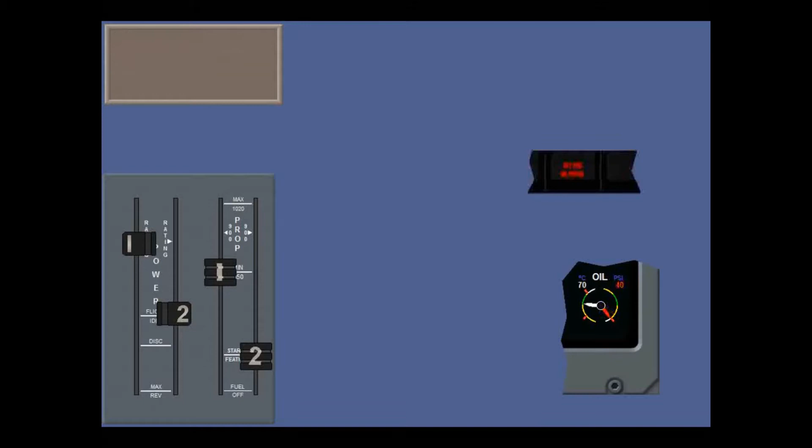Continuing with abnormal power plant conditions, let's start with low engine oil pressure. In flight, if an engine's oil pressure moves out of the normal green arc into the lower yellow band, reduce power by retarding its power lever to flight idle, and move its condition lever to start and feather to reduce drag. But if the pressure drops below 44 psi and the engine oil pressure warning light comes on, shut down the engine according to abnormal and emergency checklists.

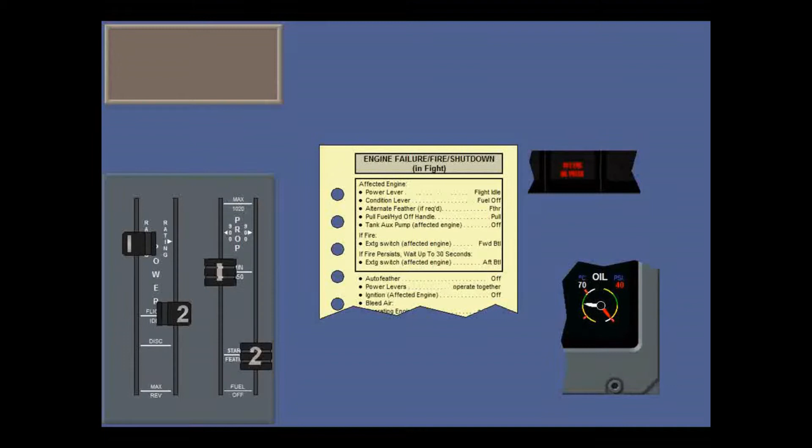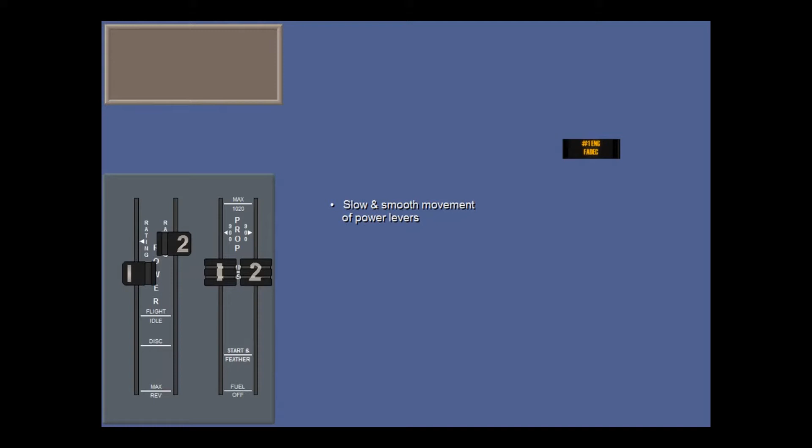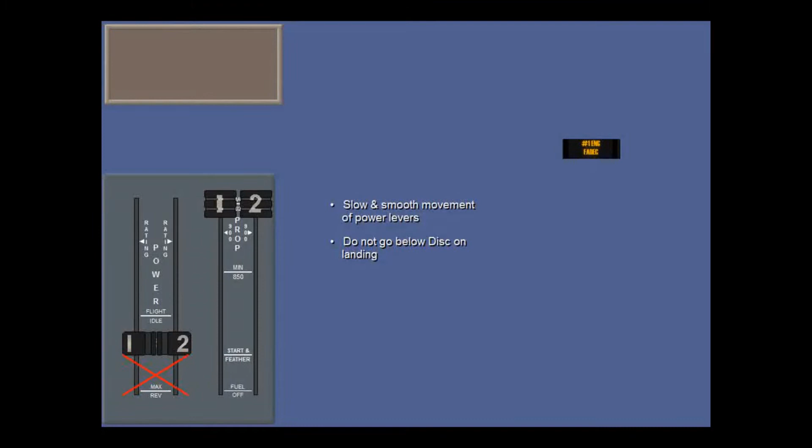If you see a FADEC caution, it could be failure of one channel, or it could be more serious. Use only slow and smooth movement of the power levers. If torque is not even, then you may need to operate the levers asymmetrically. Do not go below Disc on landing. The FADEC could give more problems. For example, overspeed governing in reverse may be inoperative.

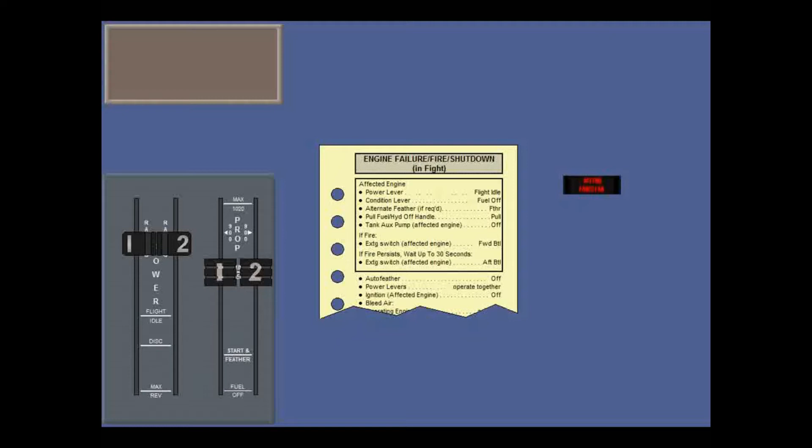However, if you see the more serious FADEC warning, then shut down the affected engine if the FADEC has not already shut it down.

Problems with the propeller electronic control system will trigger a PEC caution light. Don't retard the power levers below flight idle on landing, since you may not be able to control blade angle. So you need to increase landing distance.

In the amber region, just before the red radial, you have a prop overspeed caused by a problem of the propeller control unit. At 1070 RPM, the overspeed governor should limit the propeller speed. Failing this, at approximately 1122 RPM, the FADEC should reduce fuel flow, controlling engine power and therefore prop speed.

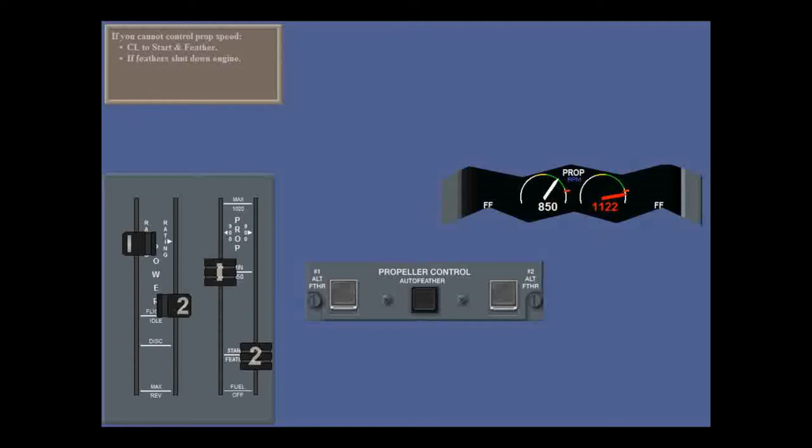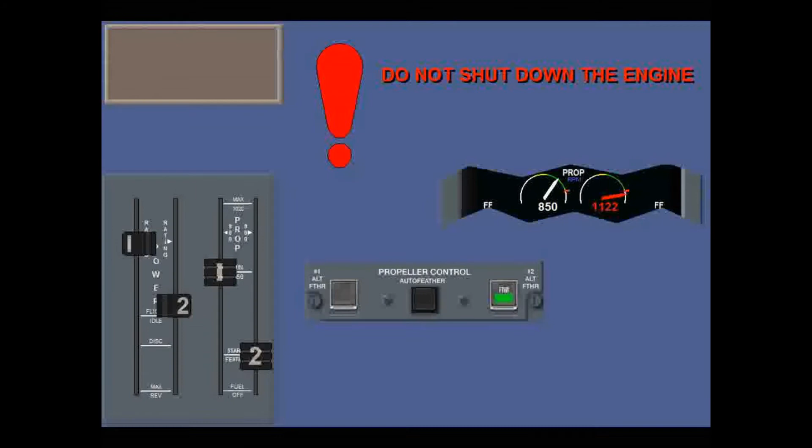Retard the power lever on the affected engine towards flight idle to reduce propeller RPM and reduce airspeed. If you cannot control prop speed, set the condition lever on engine number 2 to start and feather. If the prop feathers, shut down the engine. But if the prop refuses to feather, try the alternate feather system. If the prop still does not feather, maintain minimum airspeed and altitude, but do not shut down the engine.

This could lead to windmilling, and you need to keep the engine and propeller reduction gearbox bearings lubricated. Land as soon as possible.

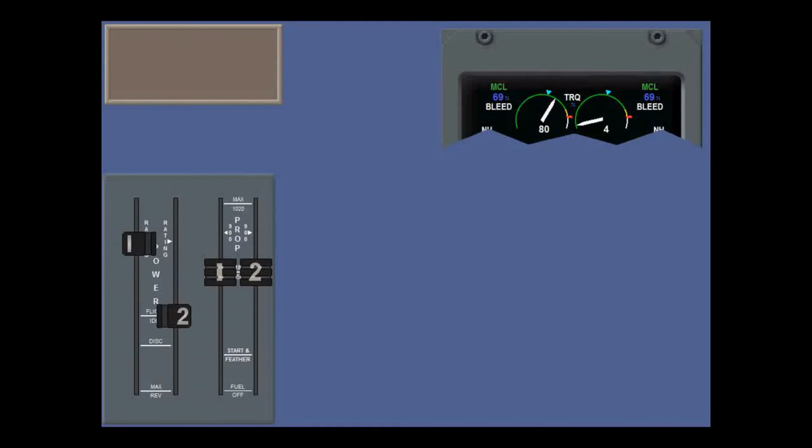Unscheduled prop feathering may be indicated by low engine torque. This could be a PCU, PEC, or FADEC failure. Reduce power on the affected engine to flight idle, but if the condition persists, there is no alternative but to shut down the engine according to checklist.

If a prop ground range light starts to cycle on and off during an approach with reduced power, this probably indicates a failure in the beta valve in the PCU. Advance the power levers above flight idle, avoiding positions that trigger the lights. Don't retard the power levers below flight idle on landing. Make sure you increase your landing distance.

Finally, engine display failures. If you get a complete failure, it is automatically redisplayed on MFD1. You should switch the engine display off, then select MFD1 to the ENG position. Touch the MFD1 selector.

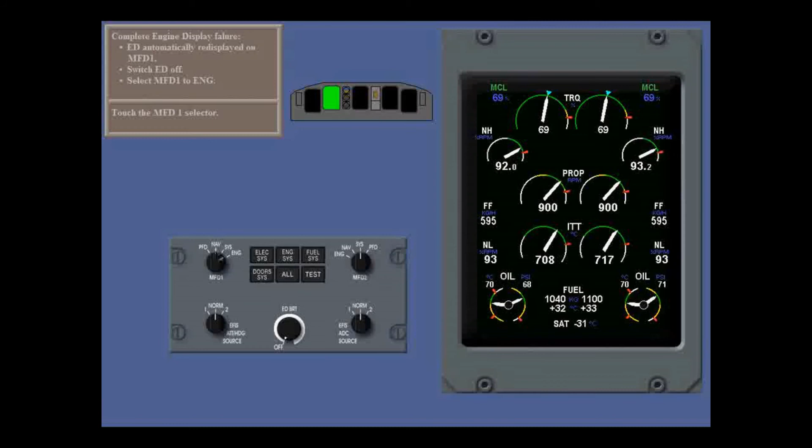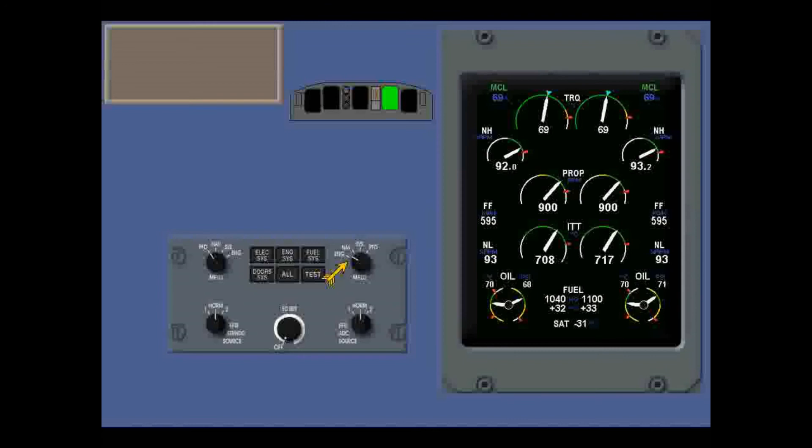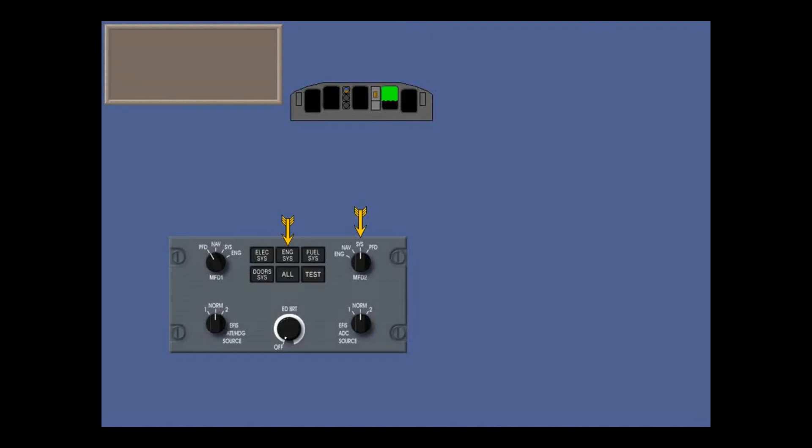But if MFD1 was already displaying a primary flight display, then this automatic reversion does not work. In this case, you can select the normal engine display format on MFD2. Alternatively, you can select the SYS position on an MFD and press the ENG SYS push button. In this case, you get the reduced format display. No dials, but with the same color changes and message advisories.

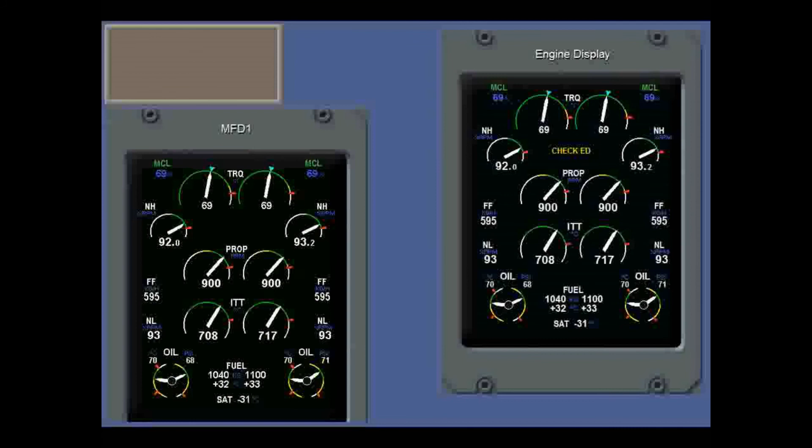If you have a normal engine display, but you see the Check ED advisory, select the engine display format on MFD1, but don't turn off the engine display. Treat MFD1 as your main engine display.